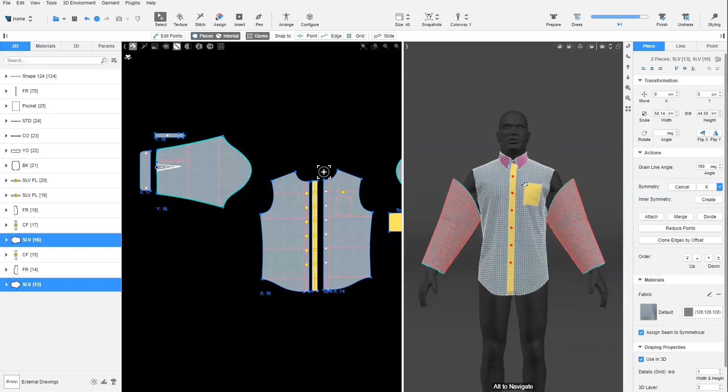We'll stitch the sleeves in the 3D window. If you're not comfortable stitching the sleeves when the bodice is dressed, remember that you can stitch in prepare mode. We then dress the garment to simulate the sleeves.

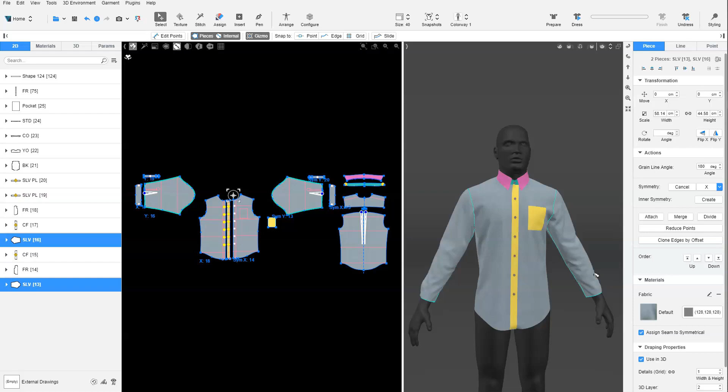Next, we need to add the sleeve placket to the sleeves. On the sleeve pattern, there should be a small slit for the opening of the sleeve placket. If your pattern does not include this, follow these steps. First, we add 2 corner points close to the marking of the opening. If the marking is just a notch, we would change it to a corner point. We want to ensure that the points are as close to one another as possible.

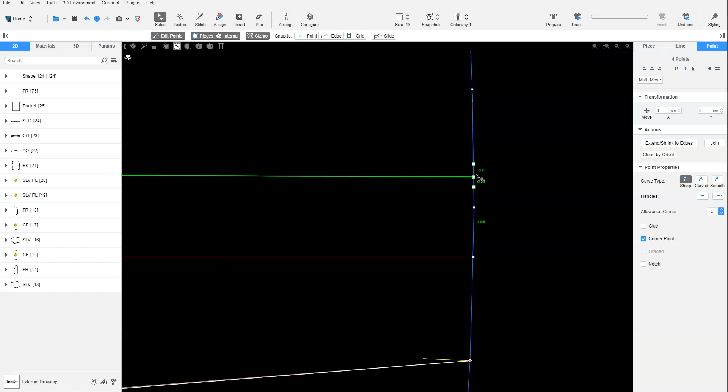Next, we marquee select the 3 points and change the curve type to sharp. This ensures the point handles are disabled. Next, we drag the middle point to meet the end of the placket opening marking. Great! Now we can stitch the sleeve placket to the internal line of the sleeve.

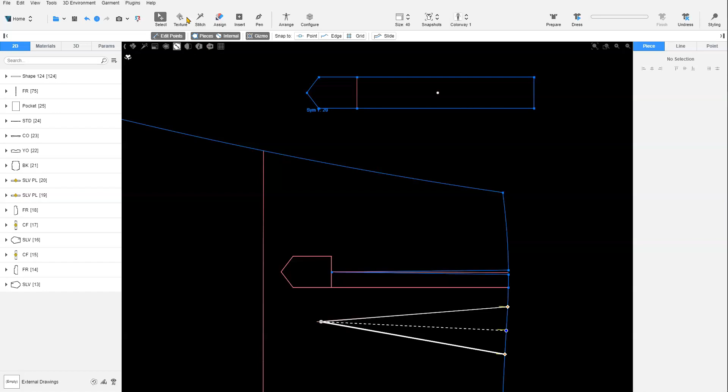We'll add a corner point here. It makes it easier when it comes to stitching the cuff. We stitch the bottom of the placket to the sleeve. We must ensure the placket patterns are arranged in the arms cluster and that Use in 3D is enabled. The 3D layer of the plackets should be higher than the sleeves.

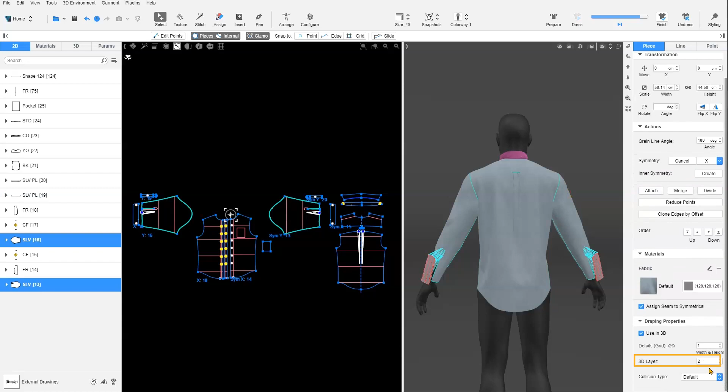Then we dress the garment to view the results in 3D. And we save a snapshot. We call this one Sleeves. The sleeves and placket are complete. Next, we need to stitch the cuff. We will stitch the cuff in the 2D window.

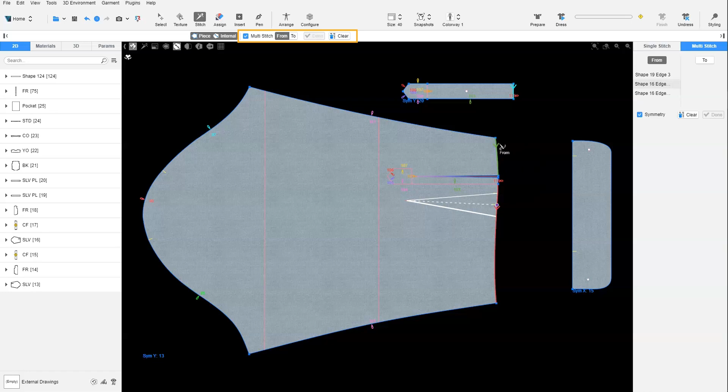Since the cuff opening will be stitched to the placket opening, when doing a multi-stitch, we must ensure that the stitch begins from the placket, continues on the edge with a pleat, and finally the edge at the top. Notice how we skip the small edge here. This part is already stitched to the placket. We've completed the from part of the multi-stitch. Now for the to part. Note how the arrows are all facing down.

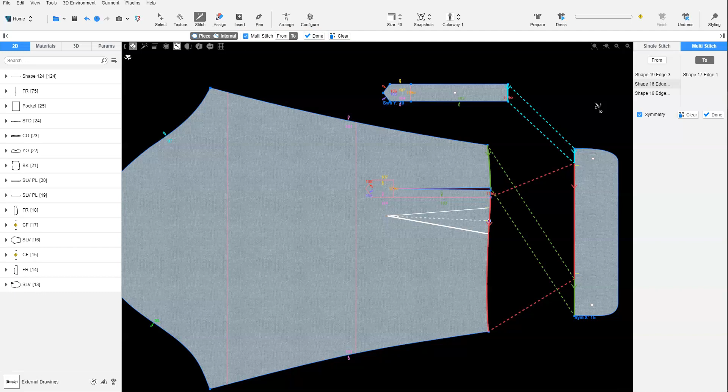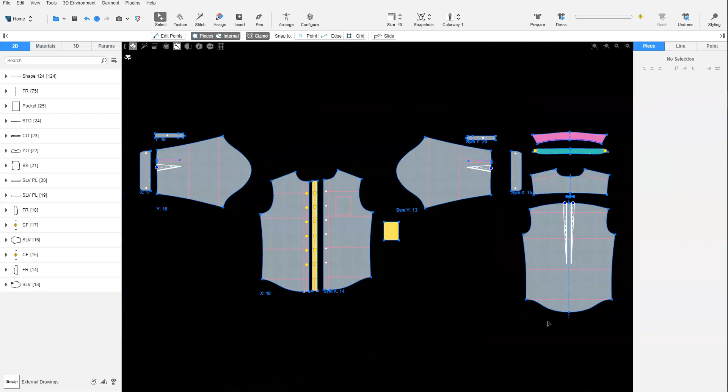After we have completed the stitching, we need to check the stitch length. As there is a pleat on one of the edges, we need to ensure the stitch measurements for the parts where there is no pleat match. Now we ensure the cuff patterns are arranged in the wrist cluster.

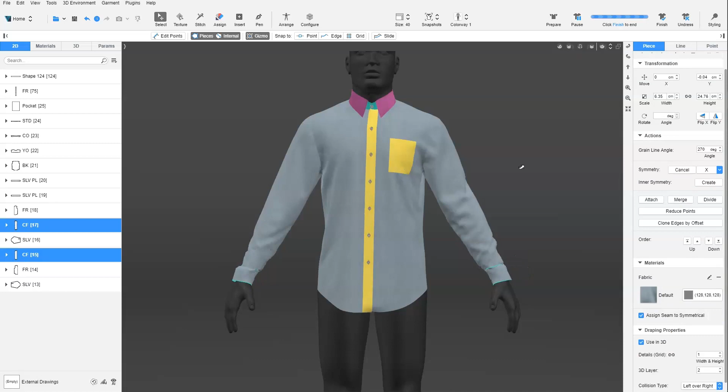We need to adjust the collision type to ensure the cuff can overlap on itself correctly. In this case, it is left over right. Now we can dress the garment to view the results. Finally, we add the smart buttons on the placket and cuff. If you want to know more about smart buttons, watch our lesson on smart trims. We save a snapshot. Since the construction of the garment is complete, we'll call this complete.

To fully complete the garment, we'll add in the appropriate materials. We must apply the necessary draping properties or attachments to the collar, neckband, cuff, and sleeve placket. Remember, you can adjust the grid size for small patterns and add force multiplier to edges that require more reinforcement. Once all that is done, we save a final snapshot and we have completed the men's shirt.